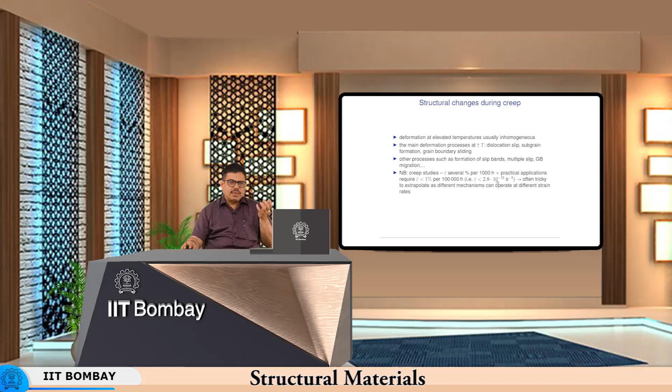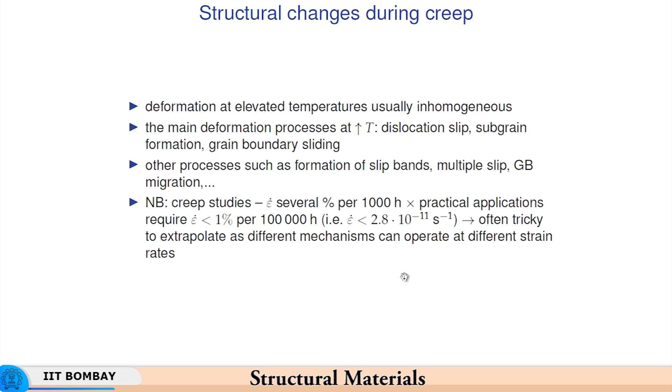In fact, the lower it is, the better it is. If it is 0, it is the best, but unfortunately if we cannot have it as 0, then we need to have it as low as possible, and therefore it should be at least less than 1% per 1 lakh hours or 100,000 hours. So now the issue is that we need to find out how to resist creep, or how do we minimize this creep rate.

Now we need to see the structural changes that take place during creep. One structural change would be that the dislocation slip or slip planes would change. So the planes of easy slip will undergo a change. You can have a non-basal slip in case of magnesium and zinc, typically HCP structures, and in FCC structures you can have slip in these planes which will be activated above 200 degrees centigrade.

We have seen that in crystal structures the close packed plane is the one that is a plane of easy slip. So the 111 plane in FCC is the plane of easy slip, but then planes which are not closely packed also become amenable to slip above a certain temperature. That is the reason why more and more slip systems come into play, and then the creep rate increases. So one way to arrest creep is to make sure that slip does not take place on these slip systems, and as the temperature increases, the critical resolved shear stress continues to decrease.

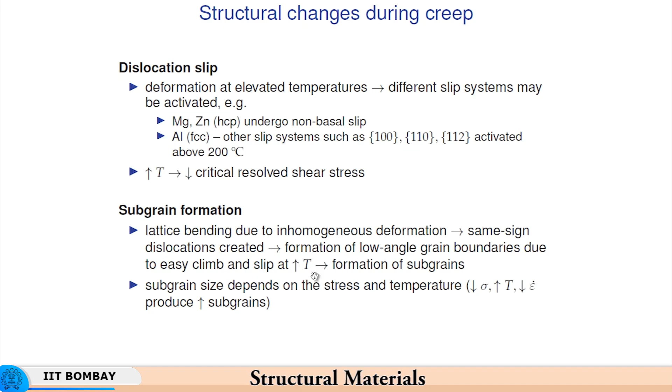That is one aspect. Second aspect is subgrain formation, and so we need to understand that formation of low angle boundaries due to easy climb and slip at increasing temperature leads to formation of subgrains. So these are some of the structural changes during creep, due to which the deformation under high temperature becomes feasible.

Add to that, you have grain boundary sliding taking place as the temperature rises. The interior of the crystal turns out to be stronger. In fact, it also softens, as we have seen. It softens because of dislocation slip becoming easier and subgrain formation becoming easier.

But because the grain boundaries soften faster, you will find that grain boundary sliding is something that starts taking place, due to which the strain in the grain tends to reduce slightly. Strain due to grain boundary sliding has to be accommodated by the process of diffusion, which is fairly slow.

So grain boundary sliding is the active mechanism, and as the temperature is large and strain rate is low, you have grain boundary sliding as a predominant mechanism. That perfectly fits in with the fact that when you have diffusion, which is a slow process, you need sufficient amount of time and sufficiently large temperature. So we have these two things possible when you have high temperature and a lower strain rate, because you have more time available under these conditions.

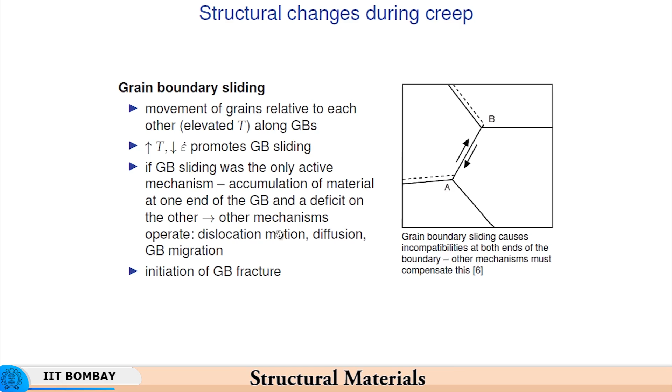And then this grain boundary migration or the diffusion results in balancing of the material. For example, you do not have accumulation of material at one end and deficit on the other. So these compensatory mechanisms continue to operate and balance the two.

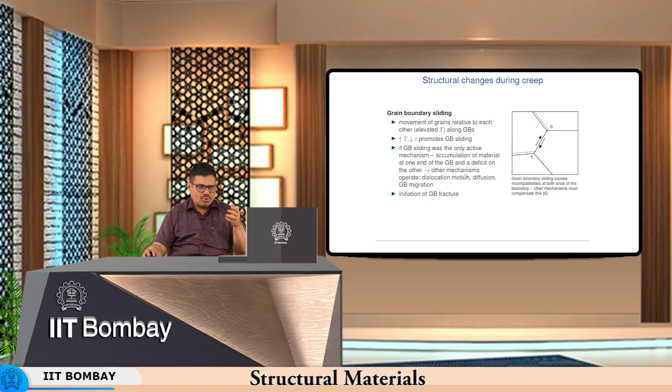So we have different viscosities in creep, and we have seen that the thermal activation of the diffusion process follows the Arrhenius type law, and so strain rate is equal to A sigma exponential minus Q by RT, where Q stands for activation energy for diffusion.

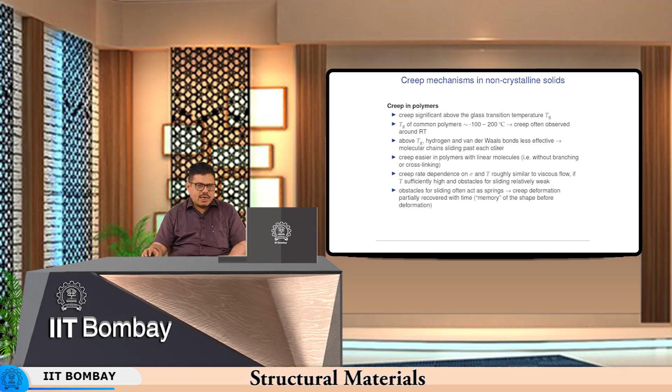We have seen creep mechanisms in polymers and also steady state creep in crystalline materials, and we have seen that there are different mechanisms resulting in different values of these exponents of M and Q.

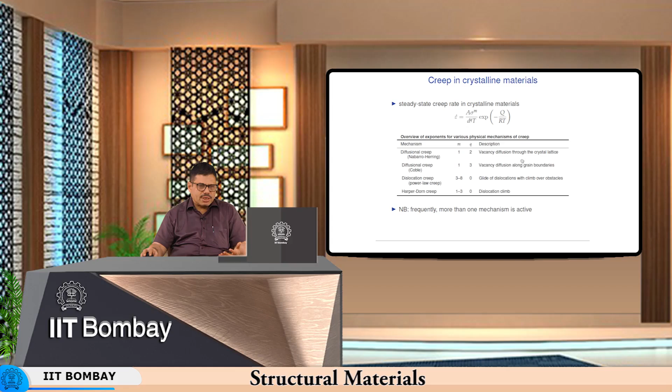Diffusional creep is through the crystal, so the crystal area is the one that is important, and Q is 2. Whereas diffusional creep along the grain boundaries involves vacancy diffusion along grain boundaries, the surface area of the grain comes into play, proportional to R cube, the cube of the grain radius. That is the reason why these exponents are different for Nabarro-Herring creep and Coble creep.

For power law creep, there is dislocation activity. Basically dislocations are the ones which are active, and therefore this happens at relatively lower temperatures and relatively higher stresses. Dislocation glide takes place, then climb, and after climbing over obstacles, the thermal part of the energy results in dislocation climb, so obstacles are avoided and dislocations continue to glide after climbing over the obstacle. This is how obstacles get circumvented and the creep strain continues unhindered.

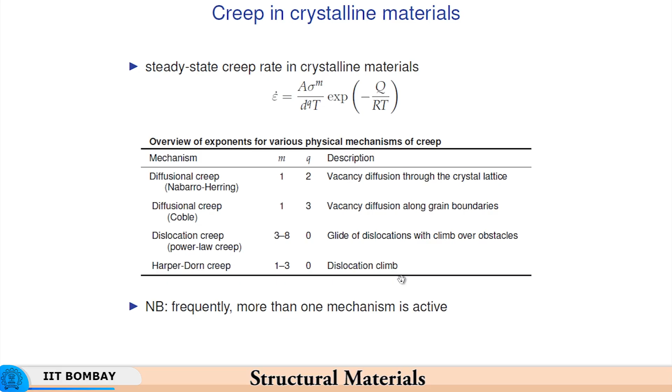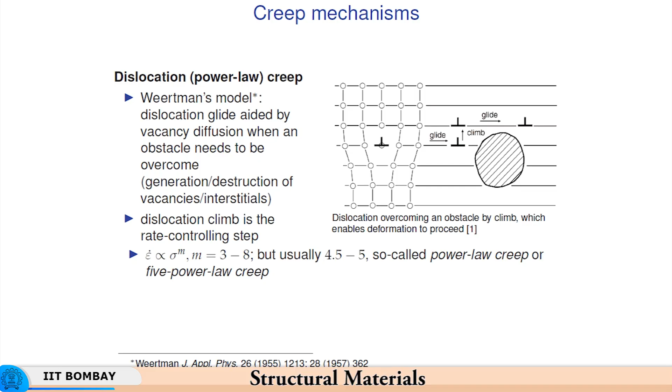Harper-Dorn creep also we have seen, it is again due to dislocation climb, so these are the different mechanisms of creep. If one has to reduce creep, consistent with these mechanisms we have seen, it is important to reduce the grain boundary area. So coarse grain size is the best as far as creep goes, and we also need some metallurgical features or factors that will prevent dislocation movement if we have to control the power law creep.

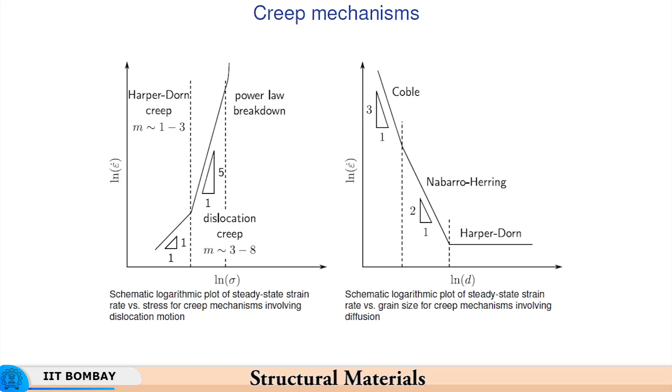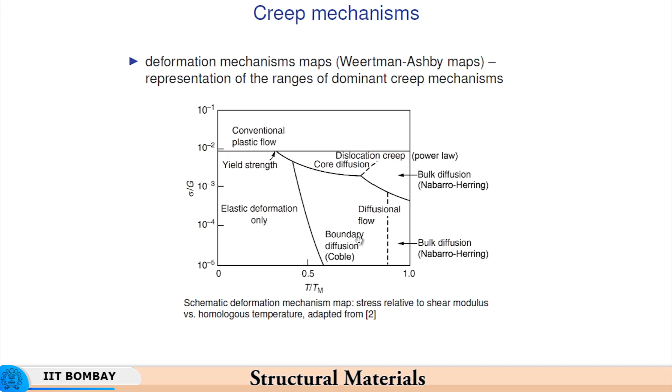So we have seen that when different creep mechanisms operate, they operate in different domains of temperature and strain rate, different regimes of temperature and time available. Therefore at relatively lower temperatures we have no creep at all, you have elastic deformation, then there is permanent deformation even when you are below the yield strength. So all these stresses are below the yield strength, and in spite of that you have significant diffusion and diffusion-related plastic deformation which is called creep.

So now we see here different creep mechanisms based on what is called Weertman-Ashby maps, and for different materials, for example here we take silver, which is face centered cubic, and tungsten, which is body centered cubic, we have different mechanisms of creep operating at different conditions. You have normalized tensile stress and different homologous temperatures, ranging from 0 to 1.

And you have what is called Coble creep at relatively low stresses, and you see that the Coble creep starts at relatively lower temperatures as well, and dislocation creep is also present even at relatively higher temperatures and relatively higher stresses.

Now this creep is also grain size dependent. For instance, at grain size equal to 10 microns, for a given homologous temperature, you would have creep taking place at a relatively lower normalized stress as compared to a 32 micron grain size, which requires a much higher normalized stress for the creep to take place. This means that as the grain size increases, the resistance to creep is increasing. That is the point being made here.

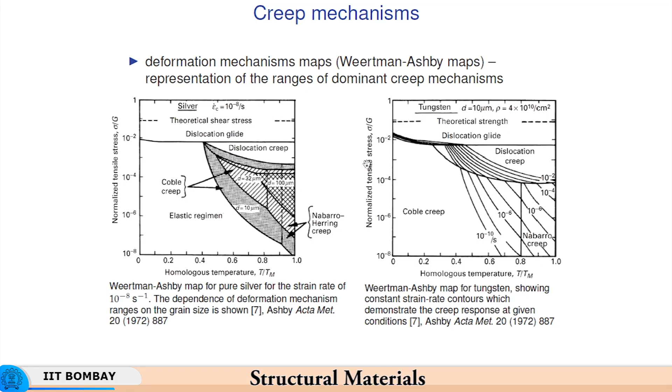So, you have in Coble creep at 0.6 homologous temperature for the same 10 microns grain size, a much lower stress at which normalized tensile stress. So, the absolute value of the tensile stress may be higher than what you have in case of silver, but then the proportion is 10 to the power minus 7 or something like that. So, we should not compare these normalized figures at face value, because the absolute value here is going to be much higher as compared to that in case of silver.

Now, if you look at different creep mechanisms, we see that there is a dramatic change in the creep rate when the creep mechanism changes from power law to diffusional flow. So, initially you have, let us say, power law. This is illustrated in case of nickel, and so when the creep mechanism changes, the creep rate changes very sharply.

So, for the creep rates at 10 MPa at 800 degrees centigrade: 10 to the power minus 6 for grain size of 0.1 millimeter, 10 to the power minus 5 for the grain size of 0.01 millimeter, and 10 to the power minus 2 for grain size of 0.001 millimeter.

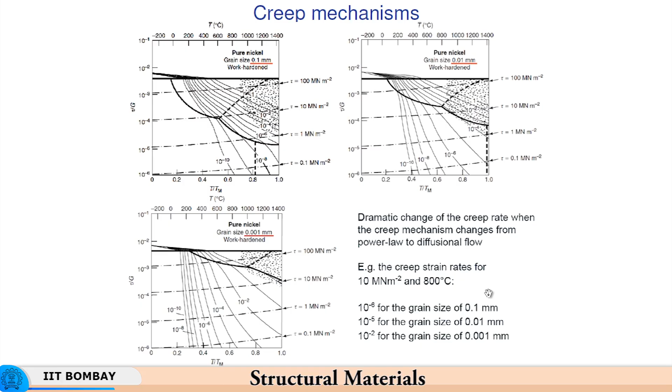So, as the grain size becomes finer and finer, the creep rate increases very significantly, as we see over here, and that happens because of the change in the mechanism. As the mechanism changes from dislocation creep or power law creep to diffusion creep, the creep rates are bound to increase quite significantly.

Now, creep fracture is the final outcome of excessive creep, and so this has to be avoided. Now, mind you, you are deforming the material below the yield point. The stress level is below the yield point, and the deformation is occurring purely through thermal effects and time being available. So, temperature, time and activation energy promote diffusion, and this results in plastic deformation in spite of the stress being below the yield point of the material at that temperature.

So, we must understand that here there is no yielding taking place the way it takes place in uniaxial tension, but here the creep is taking place purely because of the time-temperature dependent flow of material, or physical displacement of material taking place by diffusion.

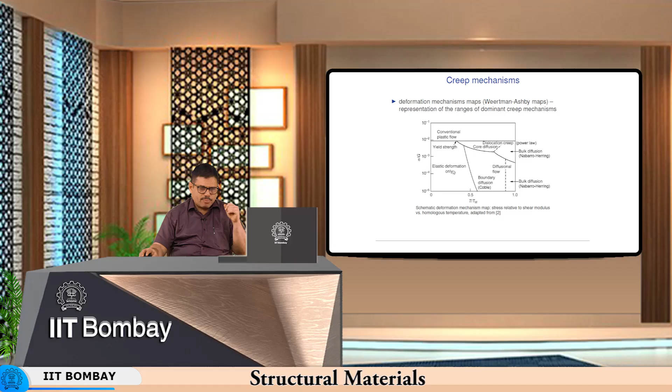So, at low to moderate temperatures, metals usually fail by transgranular failure, meaning the usual plastic deformation type of situation. As we had seen earlier, you will have more or less plastic deformation taking place at yield strength, and underneath that you have just elastic deformation. So, at low and moderate temperatures, you will have transgranular fracture taking place, probably because of plastic deformation setting in and failure taking place.

At high temperatures, you have intergranular fracture, because the grain boundaries are weaker and grain boundary sliding takes place. Wherever the grain boundary sliding and the corresponding deficiency of material at one end is not compensated by the transport of material through diffusion, you generate discontinuities, you generate intergranular cavities, and these cavities subsequently grow, coalesce, and finally generate cracks around the grain boundary, and therefore you get intergranular failure at high temperatures.

And irrespective of, particularly you take Nabarro-Herring creep, you will get failure irrespective of the fact that the stress might be low, irrespective of the fact that the grain size could be small or big. The creep rate will be governed by the grain size, but the failure will always take place in an intergranular manner in case of a Nabarro-Herring type of creep.

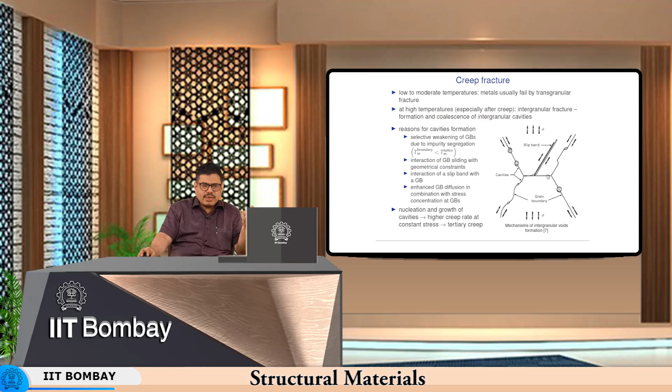Then you have nucleation and growth of cavities at high creep rates and constant stress. That is because these voids tend to grow in number as well as size, since there is a big gap between the rate at which voids are created and the rate at which diffusion can compensate for the deficient material. So at high creep strain rates, voids are created at a much greater rate, and the pace of material diffusion does not keep pace with the rate at which these discontinuities are being created at the grain boundary.

That is what leads to a rapid increase in the creep rate, which is characteristic of tertiary creep. In tertiary creep, you have a sudden increase in the creep rate at a constant stress.

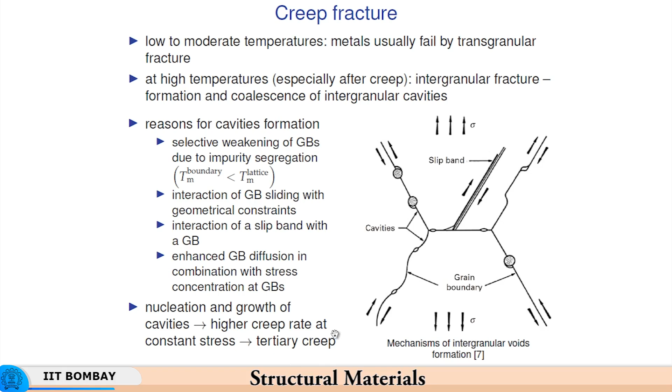So, if you consider making materials resistant to creep, then at increased melting temperature we should have low diffusivity, because diffusion controls the rate, and therefore we should reduce the diffusivity to the extent possible and increase the shear strength of the material. Now, close packed structures are generally more creep resistant due to lower diffusivity.

Actually, close packed structures meaning not in the sense of FCC versus BCC, because in FCC the diffusivity is much higher in spite of the atomic packing factor being higher than body centered cubic. So, this statement should not be seen in relation with the atomic packing factor. This does not correspond to a high atomic packing factor.

So, generally speaking, copper, aluminum, silver, gold - these are all close packed structures, but they have very high diffusivity. On the other hand, body centered cubic materials which are refractory alloys - molybdenum, tantalum (may not be tantalum, I'm not sure about tantalum), but molybdenum, tungsten - these are all materials which are creep resistant because of their body centered cubic structure.

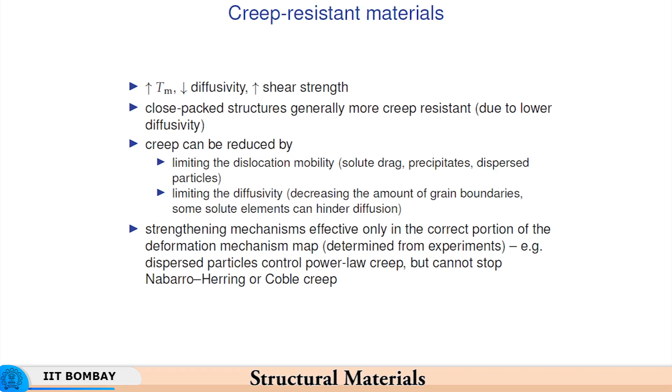So our precipitates and dispersed particles are the ones which will be operational or effective in the power law creep or dislocation creep area, whereas once you have gone into the grain boundary diffusion based creep area, when the mechanism of creep changes, the creep rate will change dramatically, because the mechanisms which operated to resist creep are no longer operational. That is the reason why there is a dramatic change in the creep rate, as we saw earlier also, in response to a change in the mechanism of creep.

When we take superalloys, these are the alloys which are meant to resist high temperatures, and therefore they are supposed to not deform at high temperatures. These are typically alloys based on iron, cobalt, nickel - these are like superalloys. Inconel 718 is a very popular superalloy - Inconel 625, 718. So these are alloys involving nickel, cobalt and iron, and these alloys resist deformation at high temperatures. Service temperatures up to 1200 degrees centigrade are possible. Now these materials also need resistance to oxygen or oxidation in addition to resistance to creep.

So, these are some of the issues which have to be kept in mind when one chooses material for high temperature service. Not only the creep, not only resistance to the mechanisms of creep, but one has to resist oxidation also at high temperatures. So, lifetime has to be close to about 20,000 hours of actual operation. It is not 20,000 hours from the time you have installed the superalloy part in the equipment. These are 20,000 in service hours.

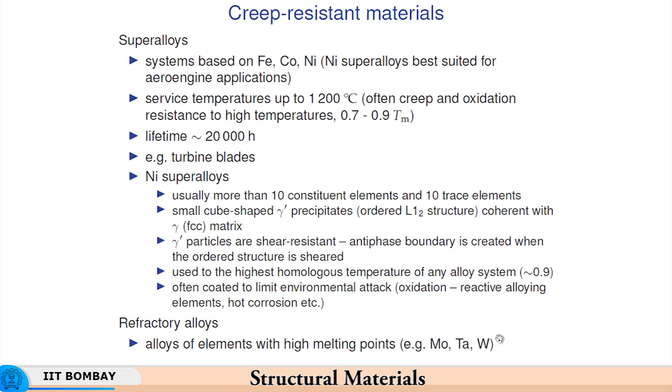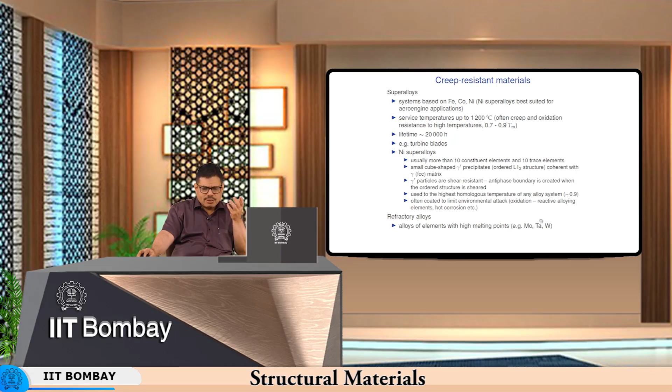So, they will no longer serve the purpose of imparting structural strength, and therefore one needs to prevent their oxidation completely. These articles made out of these materials, operating at high temperature, have to be coated all over to prevent oxidation. The oxidation has to be scrupulously kept away from these materials. Otherwise, we will lose these materials very rapidly, and nothing will be left of that part in question.

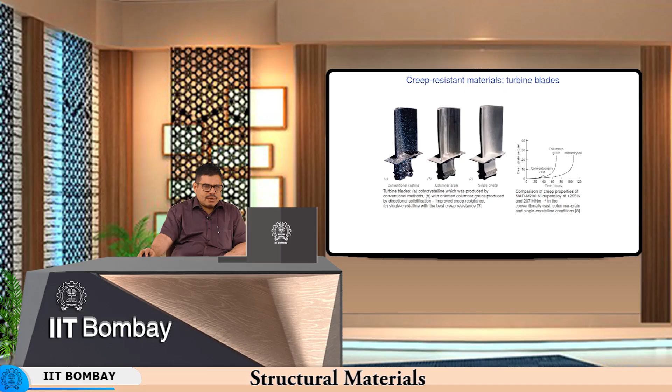So, we have been discussing about turbine blades. We have different ways of making turbine blades, and you have a polycrystalline turbine blade shown over here, which is made by conventional casting. Here they have made this by what is called directional solidification, due to which you have got columnar grains. So, the grain size is big, much bigger than what you have over here in the polycrystalline blade made by conventional methods.

So, this will not be high temperature resistant, whereas here that high temperature resistance, that is creep resistance, will be significantly higher, because the grain boundary area is much smaller than here, and even if the grains are larger, there is also directionality. The directional solidification has imparted directional properties to the turbine blade, and therefore we will have greater strength in the direction of applied loading.

However, the best thing to do is a single crystal. So, you have a turbine blade made from a single crystal. What you do is you make a single crystal. It does not have to take the shape of the turbine blade right from the beginning. You develop a single crystal in the form of, let us say, a parallelepiped or whatever section you might be able to get, a slab maybe, and you can forge the single crystal to the shape of the turbine blade and subsequently coat it with the oxidation resistant materials.

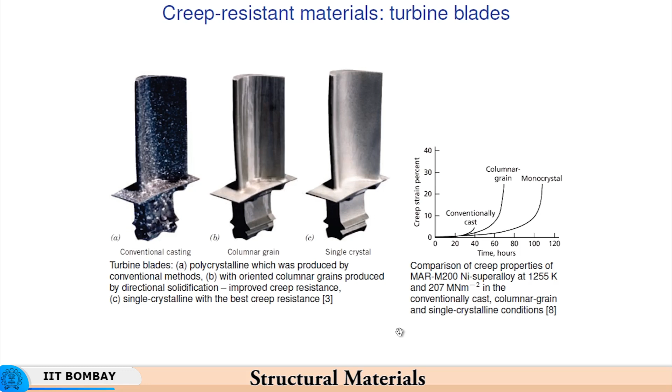If one wants to make turbine blades a creep resistant material by directional solidification, one needs to have molten material in the furnace, and the form is slowly drawn out of the furnace into the coolant, giving progressively directionally solidified material.

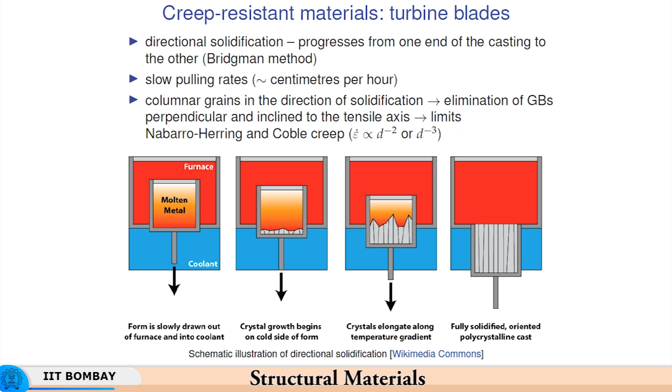A single crystal is something you can produce by having a seed crystal, putting it in a similar furnace, and drawing the seed crystal out of the furnace at a very slow rate, so that the melt solidifies around that single crystal. It will take the same orientation of crystal lattice as the seed crystal and grow in that particular direction, so you get one single orientation of the entire crystal lattice. This very long range order is produced by virtue of very slow drawing of the form, and this way you get a continuous single crystal which can be forged to the shape of the turbine blade.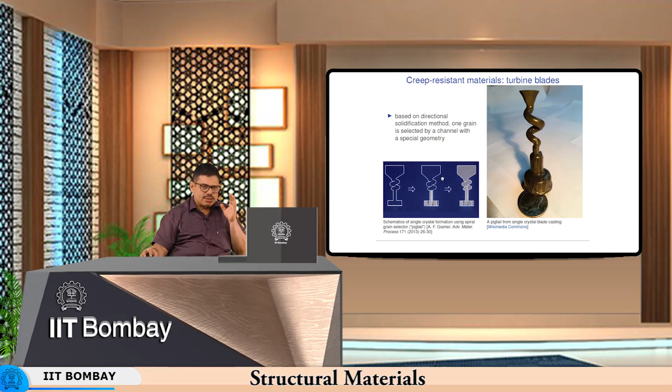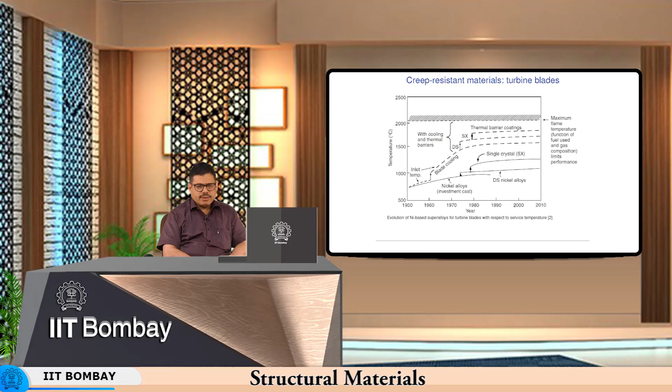Our important consideration is creep resistance. Now, when we have creep resistant materials we also have to prevent them from oxidation and environmental degradation. So it is important to apply coatings which will withstand those service and high temperatures. We need thermal barrier coatings, which will generally result in the blades being maintained at relatively lower temperatures, and most importantly prevent oxidation. Both these purposes are achieved by applying thermal barrier coatings.

If you look at this, the maximum flame temperature is here, and the temperature inside the blade, with cooling and thermal barrier coating, is quite substantially reduced as compared to the temperature that would otherwise be present.

Blade cooling is often done using micro channels produced inside the blade, through which coolant fluid flows and takes away heat from the turbine blade. Lower the temperature of the turbine blade, lesser is the propensity for oxidation, as well as higher is the strength of the blade. So if the temperature can be maintained lower by blade cooling, the possibility of creep is reduced, because as temperature increases, the propensity to creep increases very rapidly. That is why blade cooling is a very important factor.

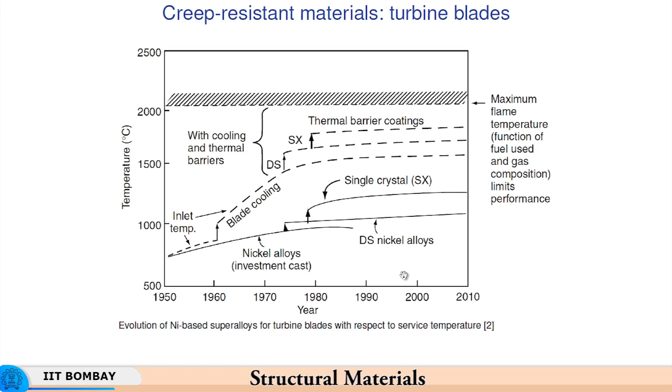That is the reason why it is important to have micro channels in these turbine blades. You see the evolution of these technologies over a number of years. Earlier people were using, not exactly single crystal, but investment cast or conventionally cast nickel alloys, and they were relying more on blade cooling to prevent creep. Subsequently these technologies became available, plus an additional factor of being able to control grain size came into play until 2010, and therefore the life of the turbine blades increased enormously.

Now, we have always been talking about creep being undesirable, about preventing creep or resisting creep all the time. But in some places creep is desirable, particularly in concrete, for instance, it relieves tensile stresses which might otherwise lead to cracking. In concrete, the steel bars are supposed to take the tensile loading.

The compressive loading is taken by the cement mortar mixture, and the tensile loading is taken by the steel bars. Now, these steel bars will be under tensile loading for years, at room temperature or whatever temperature that might prevail over a period of time, but they are always under tension for years.

Now, like any other material, the steel used as reinforcement is bound to creep, and that creep is not very significant at all, because it happens at extremely low temperature. So the creep rate is going to be extremely small, but that performs the vital function of preventing cracking. If the creep had not taken place, there was a great risk that the stresses prevalent for a very long period of time could lead to cracking of the steel bars, but that does not happen only because creep is possible.

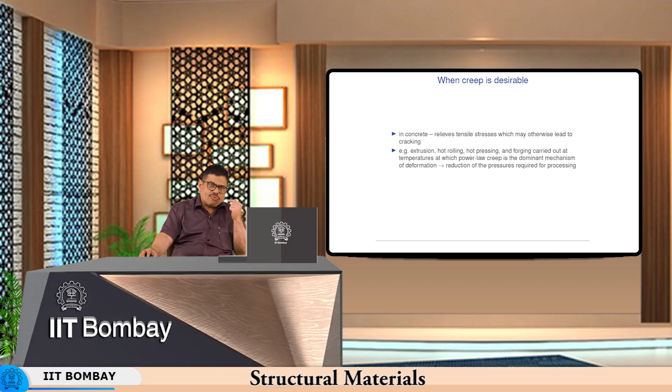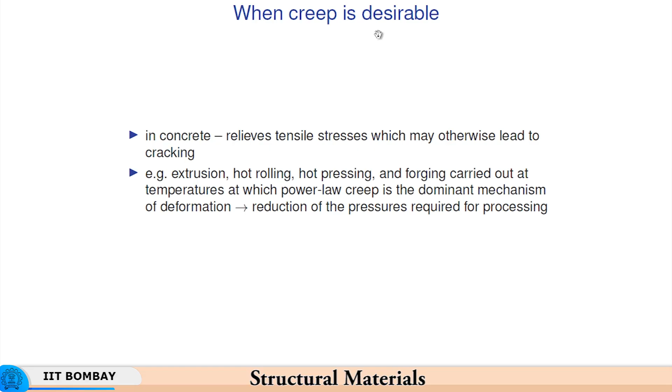You want to use creep to relieve stresses or reduce stresses in the material. So basically you would benefit from creep when you bring it about intentionally. Normally you would always prevent creep. It will still remain - it is not that creep can be prevented completely - but you would minimize the creep so that the structural integrity, the geometry based on which the component is operating, has to be preserved, and only a low creep rate, resistance to creep, is going to be important to achieve that.

So let us take a problem now pertaining to a pressure vessel which works at 950 degrees centigrade at a constant internal pressure of 40 MPa. This kind of case study, in this problem, is basically a problem of designing the thickness of the pressure vessel using two different criteria, and we will see how insufficient the criteria pertaining to yield limited design and fracture based design would be when it comes to preventing failure by creep.

So let us go through this problem and then come to the issue of creep. The pressure vessel works at 950 degrees centigrade at a constant internal pressure of 40 MPa. The pressure vessel is 1000 millimeters in internal radius and is made from a steel plate which is 85 millimeters thick. The plate material has a yield strength of 860 MPa at room temperature, and this strength diminishes with increasing temperature at the rate of 0.39 MPa per degree centigrade increase in temperature. Check if the plate thickness of 85 millimeters is adequate.

If you feel that plate thickness is not enough, it will have to be changed to the plate thickness you suggest. The fracture toughness of the material was found to be 250 MPa root meter at the working temperature, and factor of safety was taken as 2. Calculate the size of the internal flaw with and without factor of safety, and after fabrication using the plate of desired thickness the pressure vessel is to be inspected. So basically we have to also comment about whether leak before break will be achieved or not.

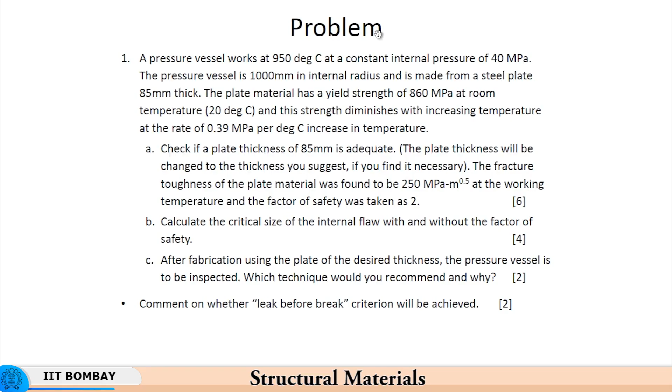Now, the yield strength is 497.3 MPa based on the fact that it is 860 MPa at room temperature, and it degrades at a constant rate of 0.39 MPa per degree centigrade increase in temperature. So every 100 degrees centigrade it will change by 39 MPa.

So you have this yield strength at 497.3 MPa, which is very close to the circumferential stress. So naturally you need a factor of safety of at least 2.

So if you look at the critical flaw size here, it is about 80 millimeters. So what it means is that the plate thickness needed for a leak-before-break phenomenon to be achieved is of the order of 160 millimeters. That is because for leak-before-break, the critical flaw size A critical should be greater than the thickness.

Okay, so this is a critical flaw size. Now here, A critical is 80.446. Since it is an internal flaw, the flaw size is taken as 2A, and therefore it is 160.892 millimeters.

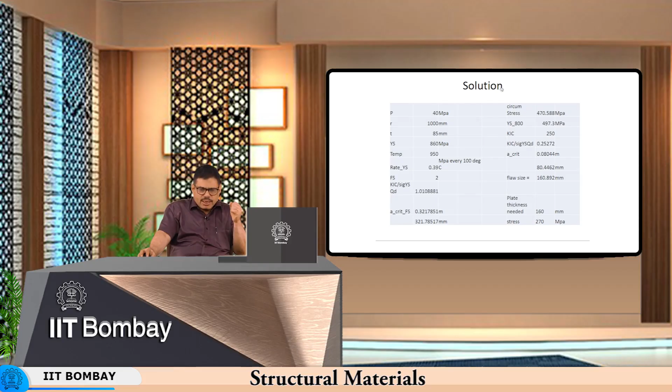And so, for this flaw A critical to be greater than the plate thickness, the maximum plate thickness we can say is about 160 millimeters, and the corresponding stress on the structure is therefore 270 MPa, which is much less than 497.3 MPa as the yield strength of the material.

So basically one would be happy that at 270 MPa the material is not going to yield, and it also shows that with 160 millimeter plate thickness, the critical flaw size is slightly greater than the plate thickness.

Now, if we take a factor of safety of 2, what happens is the critical flaw size is this much. So our 160 or even higher thickness is okay if you take a factor of safety of 2.

So the stress of 270 MPa is okay for yield limited design, but now if you look at the creep properties, we have creep properties of boiler grade steel. You see that the chemical composition is this. This is called T91 tube steel, or basically boiler grade steel. So chromium is 9%, molybdenum is 0.92, and some amount of manganese, and the other elements are meant for grain size control, or basically carbide formation, and for precipitation of carbides in general.

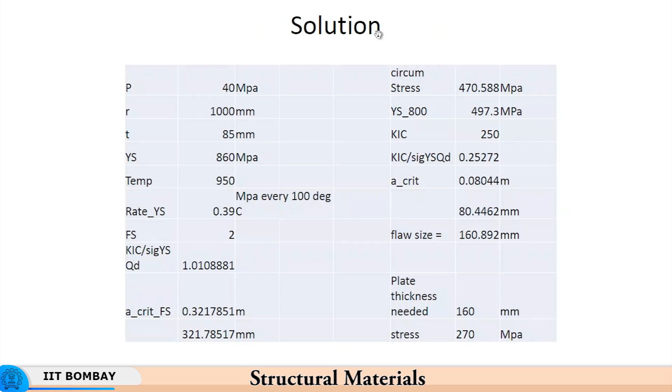So we need to consider creep and creep strain as a criterion for failure, and increase the thickness further to minimize the stress, or bring the stress to below, let's say, 55 MPa or so. Now, 55 MPa is a ridiculously low stress for a material that will yield at something like 860 MPa at room temperature, but yes, it has to be that low in order to prevent significant amount of creep.